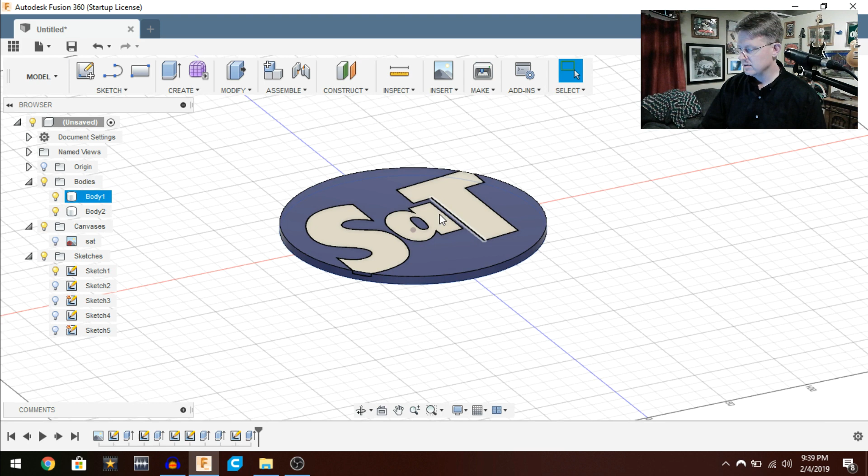Okay, so here we are in Fusion 360, and what we're looking at is the Stuff and Things logo, kind of the blue circle with white text inlaid. And if we rotate to the top, you will see exactly what it's supposed to look like.

Now the way this came out the first time was I just had a disc with the letters just kind of sticking up out the top. That's not what I had in mind for this. What I had in mind is exactly what I have here, a blue disc with the white letters recessed down inside of it, which I think is kind of cooler. It just is kind of a medallion looking thing, and I don't know.

I just think it's kind of nifty when you have interlocking parts. And I don't have a dual color 3D printer or anything, so I can't really do something like this without having to separate the parts out. So what I've got is...

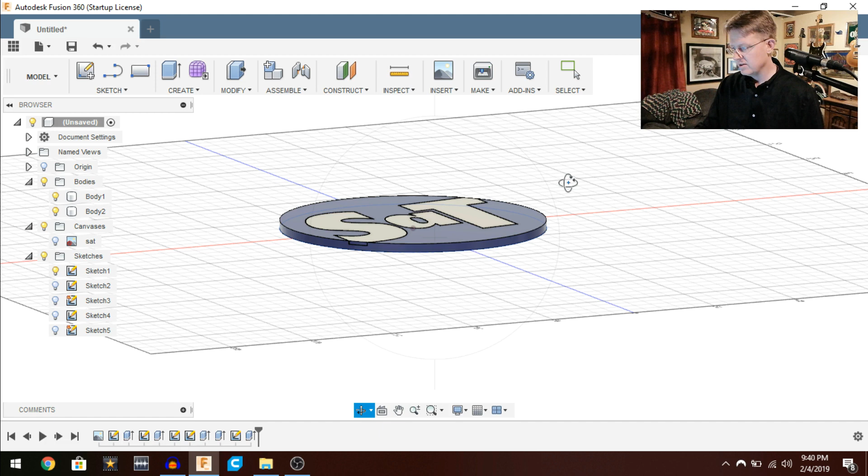Let me go back to the top view. Oh, this will work. So we've got this disc and the letters modeled up. Now the disc itself is 5 millimeters thick, and the letters are 2 millimeters thick, and they are recessed down inside of it. So there maybe are a couple of dress-up things that I might try right now.

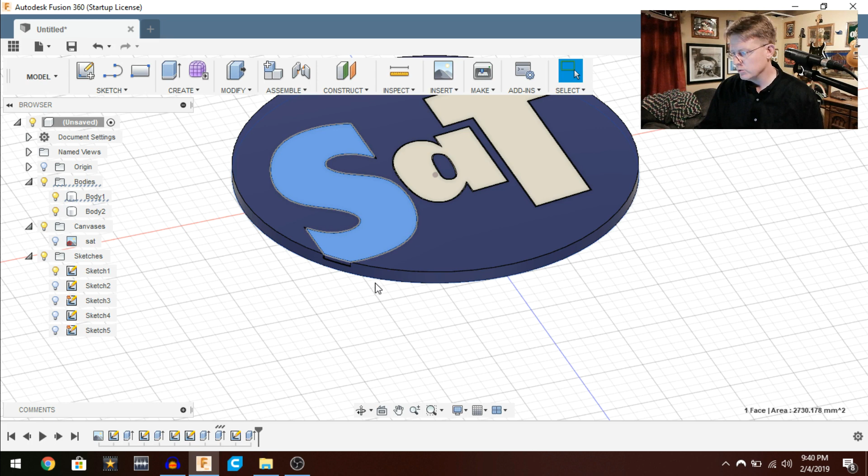Like, I think it might look cool to put some sort of a chamfer around the outside of this, so maybe we'll try to do that real quick. But the first thing I'm going to do is go ahead and save this as SAT, and that way if I screw it up I can always just go back.

So what we're gonna do now is let's see if we can figure out how to chamfer something. So you guys didn't get to see me model this, but you're gonna get to see me fumble around and chamfer it. So right here we've got a chamfer tool. Let's just say we want to chamfer this guy. Oh, equal distance, that works.

So let's go here and see what a 1 millimeter chamfer would look like. Ooh, that looks pretty special. But I think I want to go even bigger, because with me it's go big or go home. So let's put a 2 millimeter chamfer on there.

Yeah, that looks good. I think that looks nice. You can see how that kind of dresses this up a little bit. So let's do that again for this side over here.

2 millimeter chamfer. Okay, and then we've got the T and the S that kind of hang out over the side there, so we're going to do those also. Let's go here and put a chamfer on here. We're going to pick this edge and say 2 millimeters.

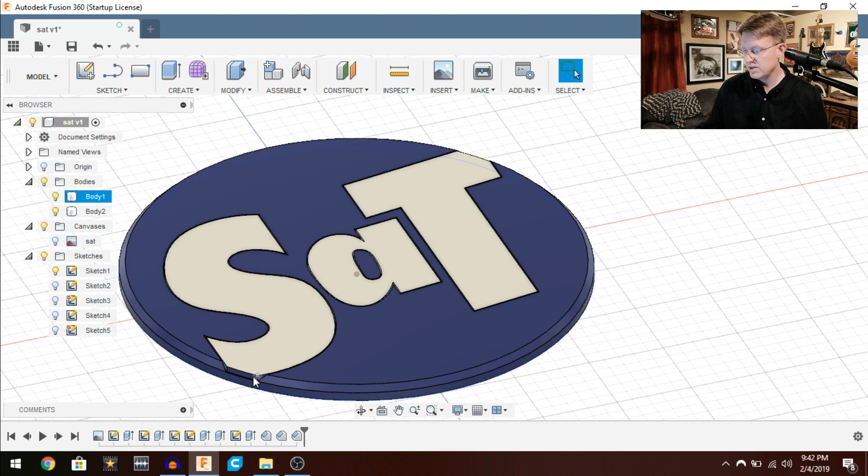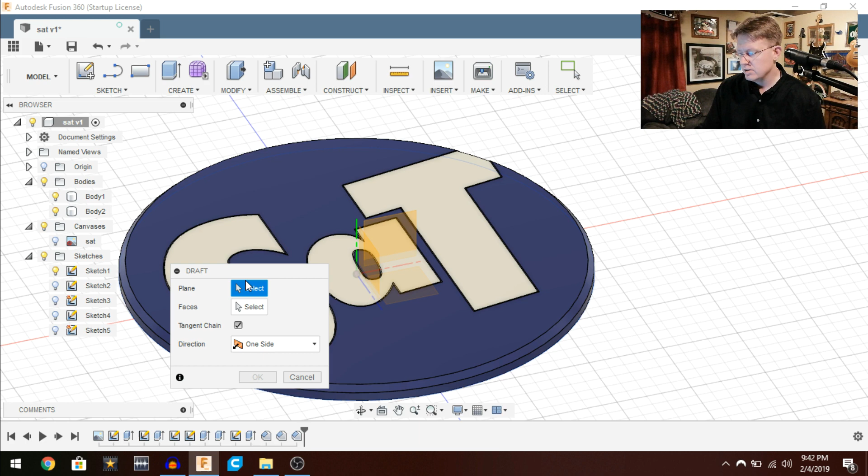And then we're going to do the same thing here. Move this guy out of the way. Nope, nope, nope, I clicked the wrong button. Quit fat fingering it. Chamfer. We're going to pick this guy right here, and we are going to say 2 millimeters. Just like that. Now, I think another thing I might want to do is just give this guy a little bit of a chamfer just to kind of help key this in here.

Now, I gave this a 0.4 millimeter gap between the blue disc and the white letter, and that should be plenty. Usually for a tight tolerance I'll do a 0.3 millimeter, but the way that this has the interior shape here and everything, I figured I'd go that extra 0.1 millimeter. I mean, what's 0.1 millimeter between friends, right?

So I think, though, to help get that in there, I'm going to go ahead and put a chamfer on that guy, on this guy, of 0.5. Let's see what that does for us.

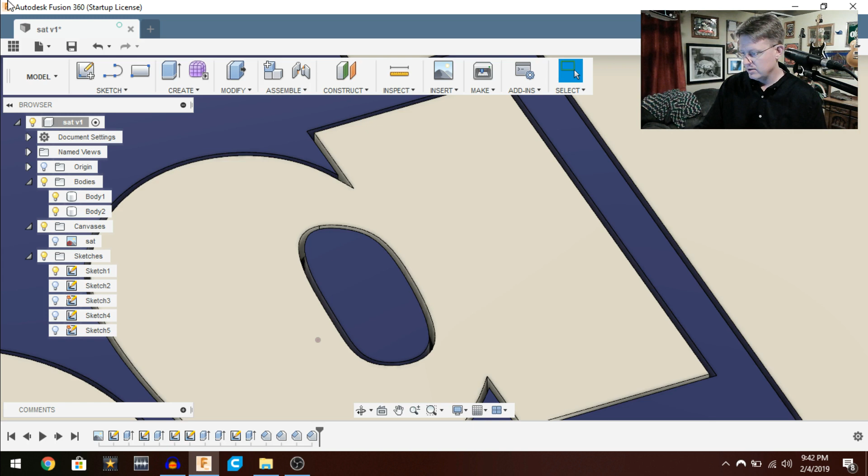Just a little bit of a chamfer, and maybe actually it would be cool to do... I wonder if I'm still... Nope, I gotta go pick it again. Alright, hang on a second. Maybe it would be cool to chamfer the insides of this also, 0.5.

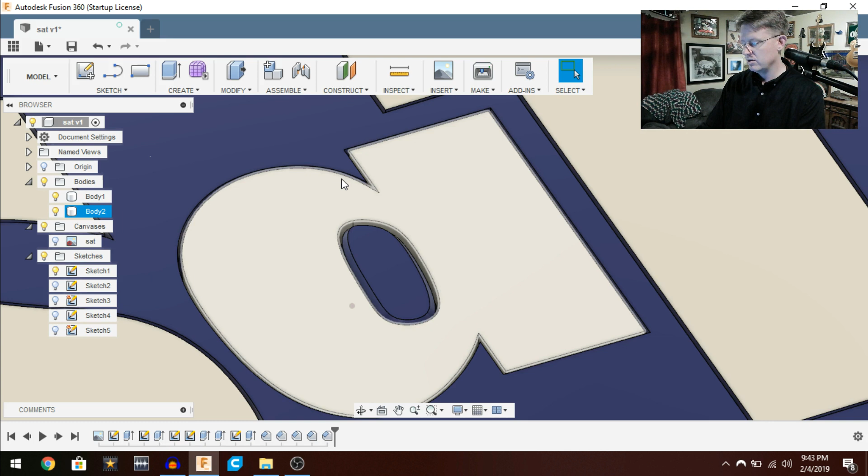And then maybe what we'll do is chamfer this, 0.5. And then maybe we'll just chamfer all of it by 0.5. I don't know, select edges to chamfer. Oh good, I can pick more than one at a time. This one, and then we're going to go 0.5.

Okay, so that looks pretty nice. Let's orbit this around just a little bit and see. Now, 0.5 chamfer when this is printed probably isn't gonna amount to much, but anything to kind of reduce the sharp edges, especially when you're keying something in like this, is never a bad thing. So even though it's just a small chamfer, we're gonna go with it.

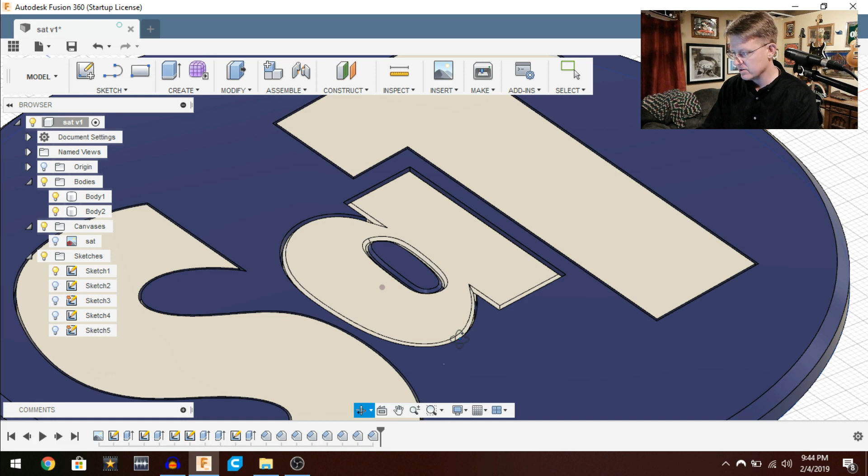So let's go ahead and chamfer all around here, kind of like this, and then go 0.5. Yeah, you know, I think that looks pretty nice.

So we're gonna go ahead and go around all of the edges for the S and all of the edges for the T.

That looks as good as this full Virginia flake tastes.

Okay, now let's just give this a quick rotate and make sure we caught everything, and I think we're doing pretty dang good. The only thing that I think I don't like...

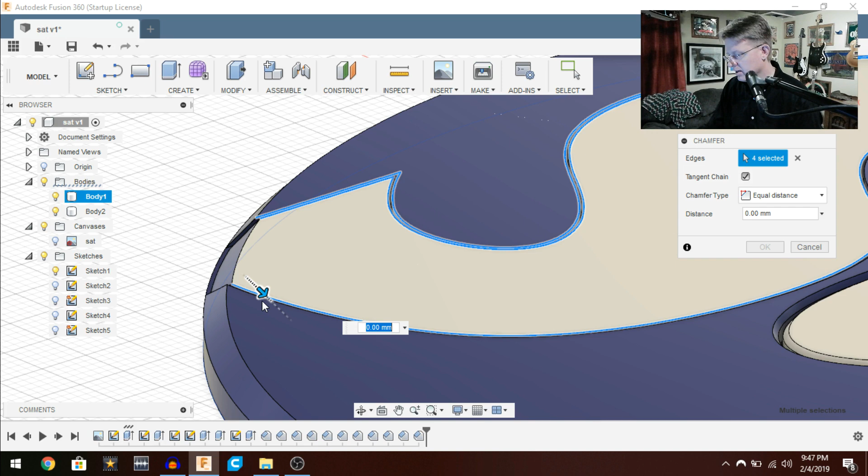is these chamfers right here. I wonder if I can pull these out a little bit. I wonder if I can.

Yeah, just like that. Ah, that's not what I wanted to do. No, no. No, that's not what I wanted to do.

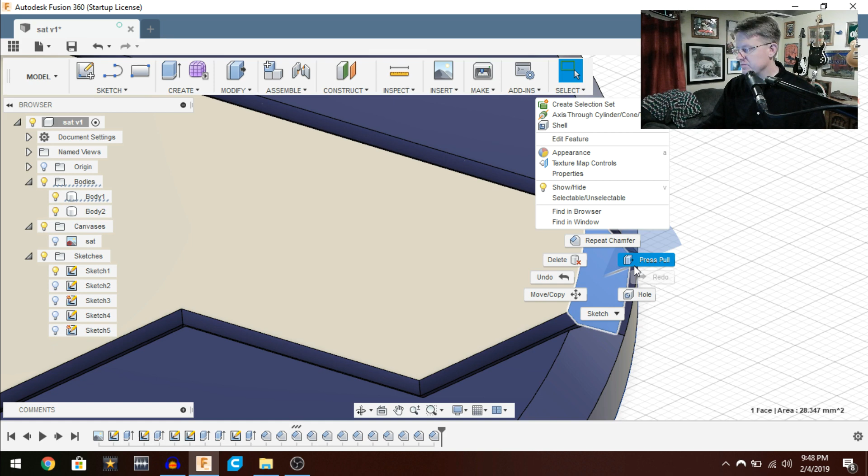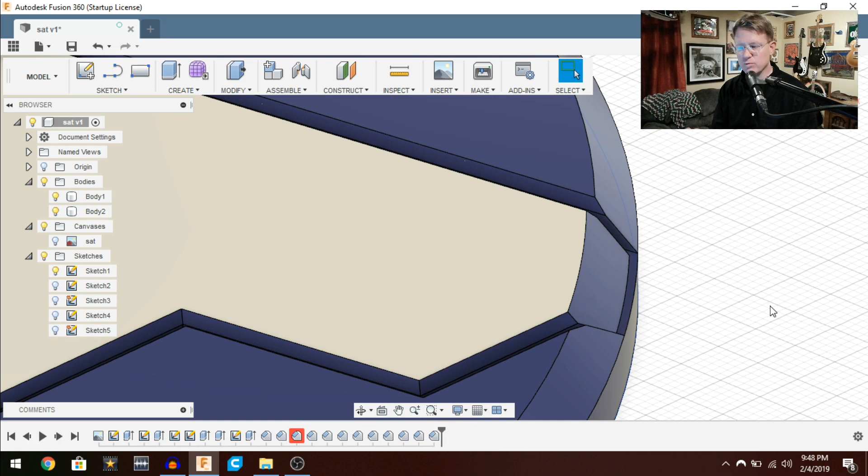You know what, I'm gonna leave it. I'm gonna leave it, it's probably good enough. Well, for what it is, I think we're gonna just call it good, because once I get these glued in there, there's gonna be a little bit of wiggle room. So I don't want to get it too exact, especially with the way I've got a nice big 0.4 millimeter tolerance here. So I think we're gonna call it.

What we need to do now is export this, and I actually think that this bowl is nearly done. Let me see here, which is a shame because I'm not ready to be done with it. Nope, I got some more left. Stand by, must relight, had to retamp, and now I must relight.

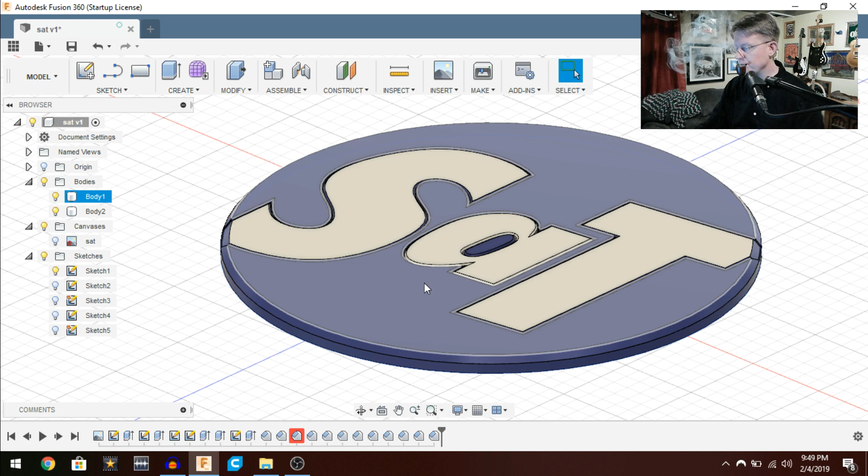Alright, now what we're going to do is export.

So we're back, and I have Cura opened. Cura, whatever, however you want to pronounce it. I've got Cura opened, and I have all of the individual components for this print saved as STLs.

So let's go ahead and jump into Cura here, and let's slice these so that we can send them to the printer. So the first thing we want to do is go to 3D objects, and we're gonna go to SAT base. That's the bottom piece. Okay, so here it is.

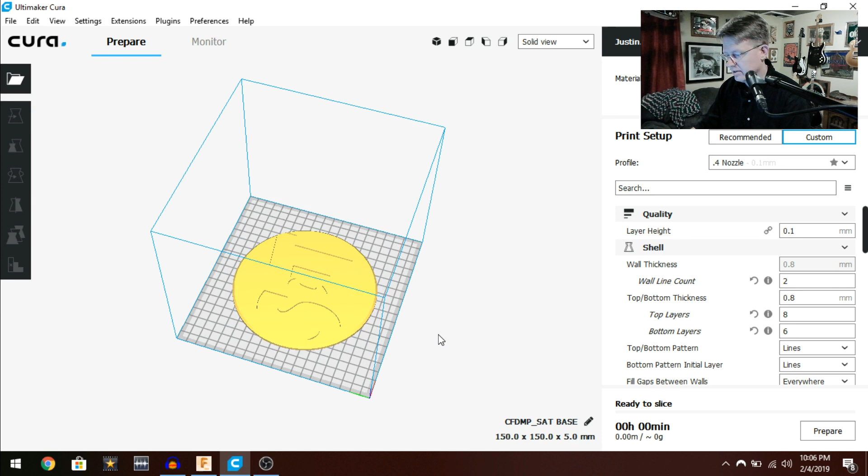Let me rotate it around so you can see. We've got the SAT insets, right? So it's all recessed, that way everything sits down in there nice and flush. But we need to rotate this so that it is flat on the print bed. Alright.

And then we need to set up our settings here. I think I want to go ahead and print this solid, so let's just go 100% infill.

And let's change this to 30. And then wall speed, let's go 20. Slow it down, nice and slow. Slower the better. Okay, so then we don't need supports. Not that that would make any difference, but I'm gonna go ahead and turn those off.

So let's go ahead and prepare this. That's gonna take a second because my computer is working overtime right now because I am recording audio, I am recording screen capture, and I'm slicing, so patience. We'll get there. There we go. Slicing.

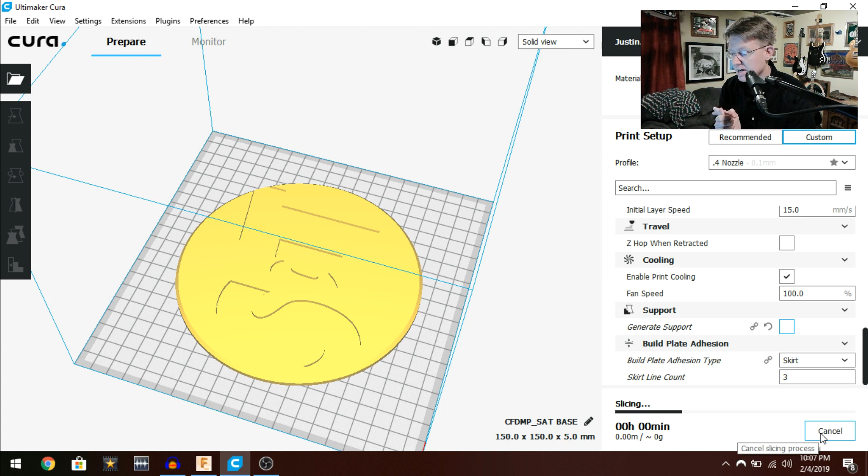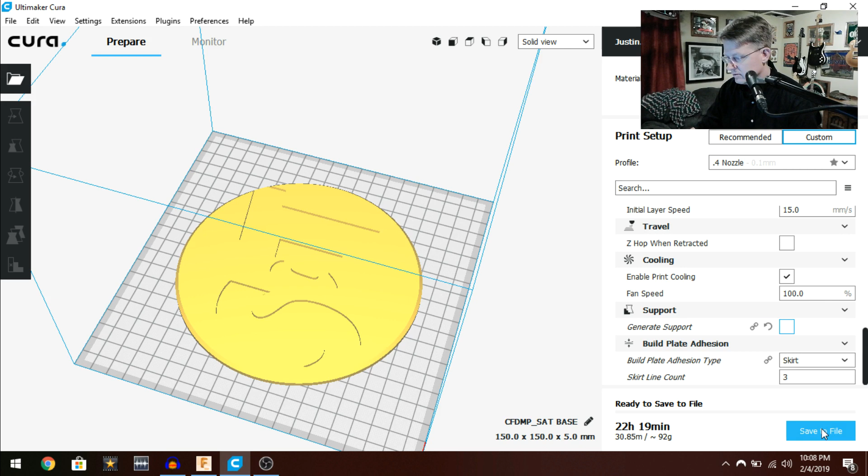Ready to save file. 22 hours. That's a long print. Now, once this gets going, I'll speed it up, so it's not a big deal. Plus, I'm printing it solid, so it is going to take a little while. But that's okay. So we're going to go ahead and save this to file. And for 3D print, we're going to say...

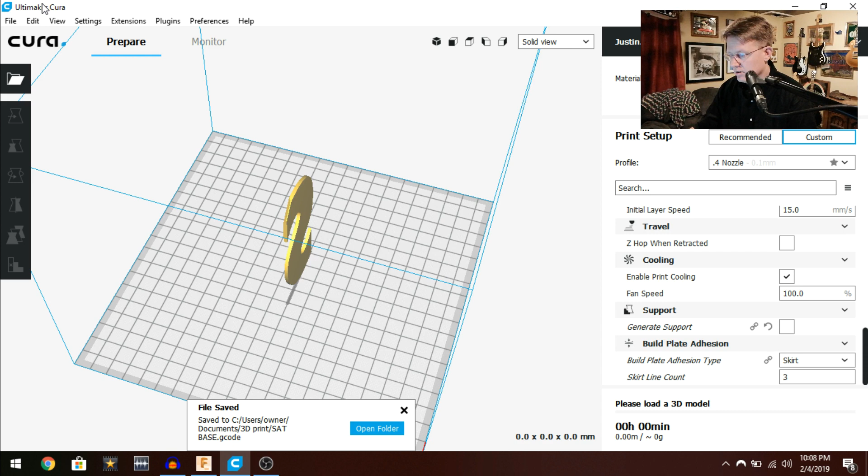SAT base. Alright, so let's go ahead and clear the build plate. And let's get our S, our A, and our T loaded in. So we're going to go S. And then we need to rotate this guy this way. Right there. Make sure that the fillet is on the right side. And it is.

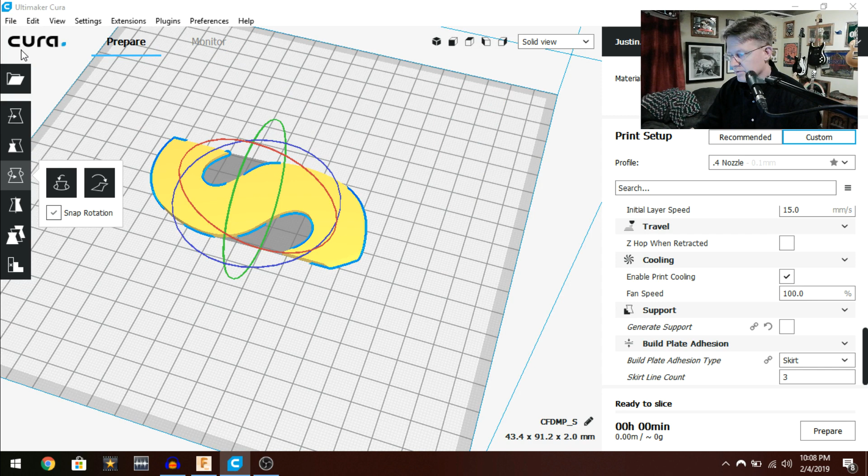So let's go ahead and bring in the A. Now I'm going to print these all in white, so I can print these all at once. As long as they'll fit on the print bed, we'll be alright. So let's go ahead and rotate this guy down 90, 90, there we go. And then let's open the T.

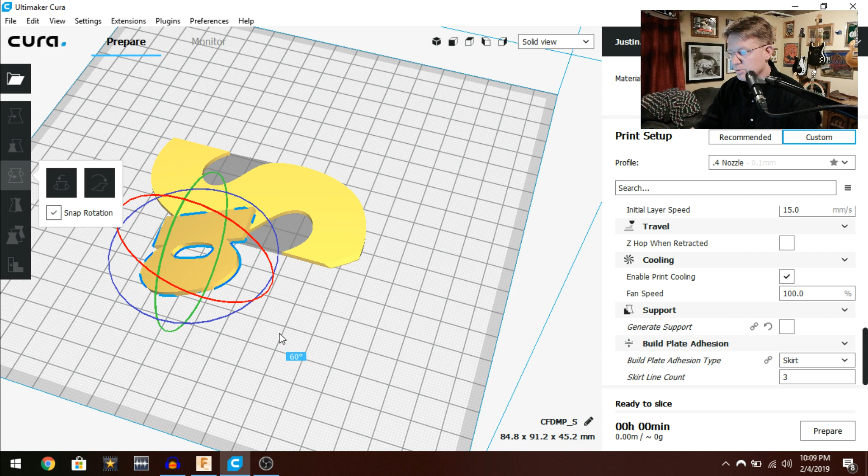Stick it on here. Okay, pick this guy, and then we're going to rotate this 90. Now, we also need to make sure that we're not printing it upside down, because it'll fillet on that side, and we are good to go.

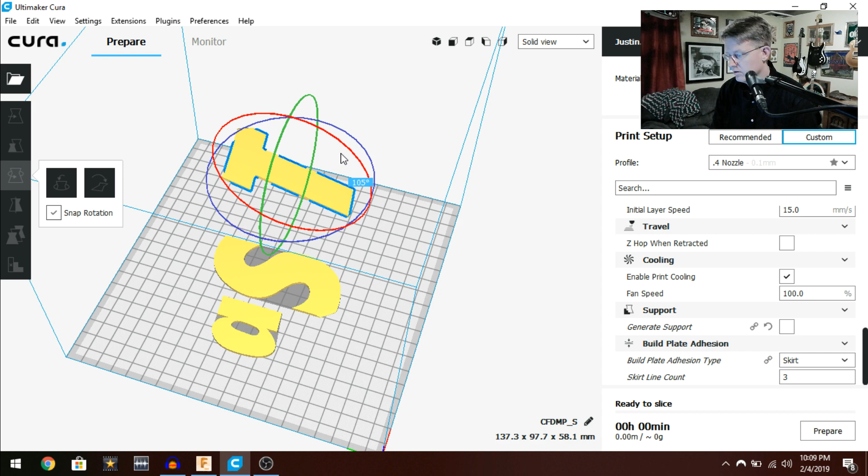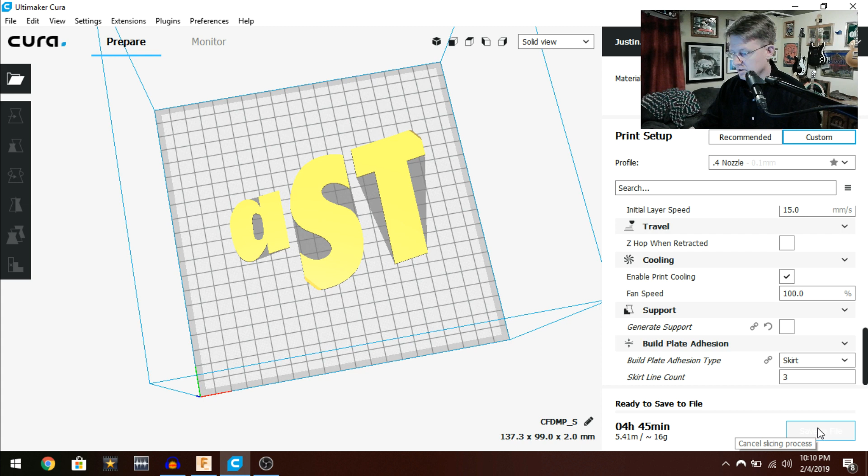So, I think what we're going to do now is go ahead and hit prepare. And we're going to let it think for a moment. Okay, so we're going to save this, and we're going to call this SAT top. SAT top. Okay, so I think from here on out, I just need to go get an SD card, pop these onto the SD card, and then I'll meet you guys back over at the printer here in just a second. So let's just hang tight.

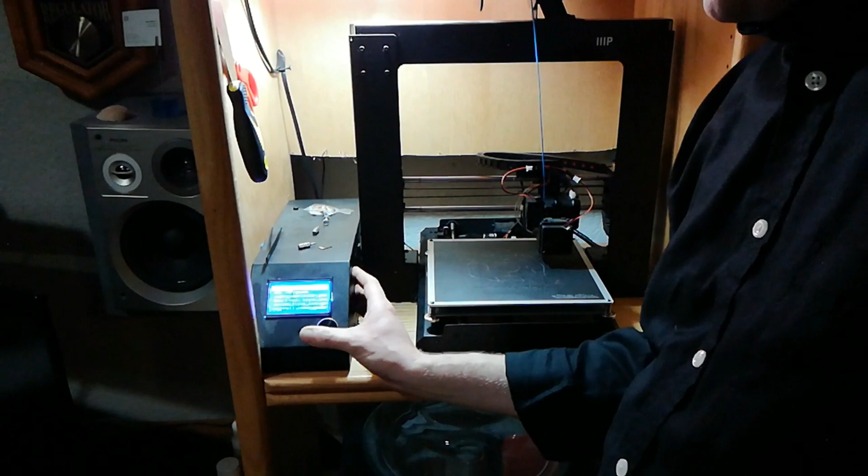Alright, we are at the 3D printer. We're going to go ahead and put the SD card in. We're going to go ahead and mount that guy up. We're going to go print file, and we're going to scroll down to SAT base. We should have SAT top on here too. Yes, we do. Okay. SAT base.

And it should start to print here in just a second here. Okay, so we're all set. We're off to the races. Printer is going. I got a time lapse going here. Looks like we're gonna be good to go. So, hey, open for business, baby. So, I guess I'll just have to come at you again tomorrow with the finished.

No, it's 22 hours. Yeah, it'll be tomorrow. It'll be tomorrow late when this thing is finished. So this particular video is going to be a couple days in the making, but that's okay. So just for me, it's going to be a little while. For you, it's going to be instantaneous. So, you know, instant gratification. It's the American way, right?

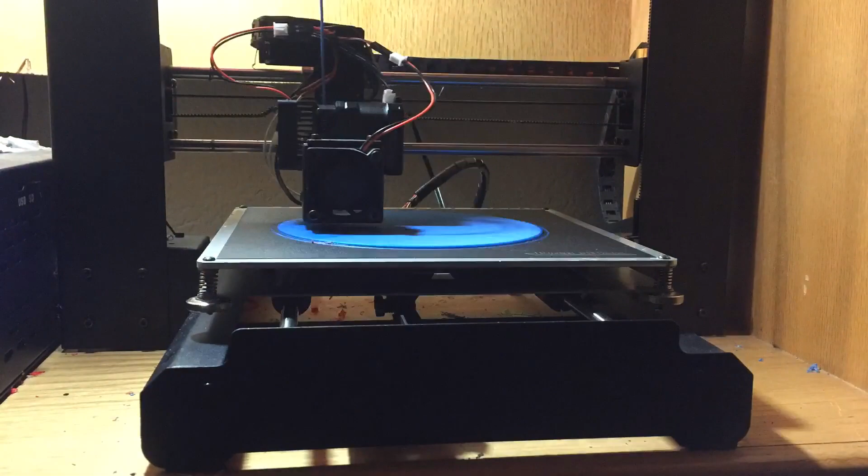Well, good evening and welcome back to the joint. It is night number 2 of the 3D print project, and I am sitting here with my Calabrese Bulldog enjoying some Stonehenge Flake.

Now, I have some good news and I have some not so good news. Good news is that this finished printing, okay? And the extra good news is that the top of it looks really nice. So you can sort of start to see the white SAT will kind of key into these recessed areas, and then I'll glue them in, and then it'll be this nice logo.

Now, here's the not so nice part. If you look at this, it's nice and flat until you get over to right here. And the problem with this kind of a print is that it is so large, the surface has so much surface area that this side over here cooled off at a different rate than the rest of it, which meant that it pulled up off of the print bed just a little bit. So, this right here, as good as it looks from the front, is... it's trash.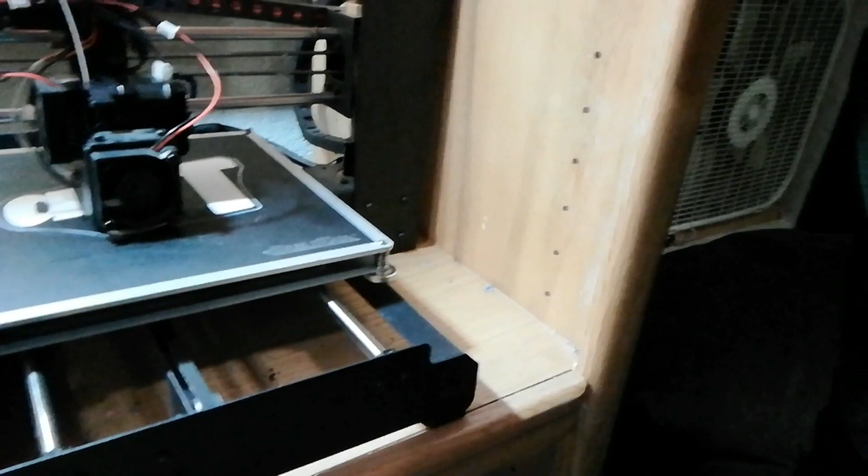So, we're moving right along. Let me move into the light. Things are looking really nice. I cannot wait to actually glue this all together and show you guys what it looks like.

Hopefully he'll open this on a Sunday smoke and be like, holy crap, this thing is awesome. Because really it is. If I had a logo for Justin's Joint, which I don't, maybe I should, I would totally do something up like this, because this is freaking cool.

So, actually I just realized that this is the warped one. But anyway, either way, it's going to be awesome.

I'm super excited. And I'll be honest, I have a big spool of red that I've been having a lot of trouble with. It keeps breaking off inside the machine, like it got too hot in the container on the way over here from China, and I don't know, I just haven't had very good luck with it.

So I'm gonna try and make Bradley's other logo for Stuffin' Things Plays, just to use up some of my red, because I have it, I want to use it up, because it's kind of crappy. Something big like this should print alright. It just doesn't work real well for intricate things, which is what I've been trying to print with it lately.